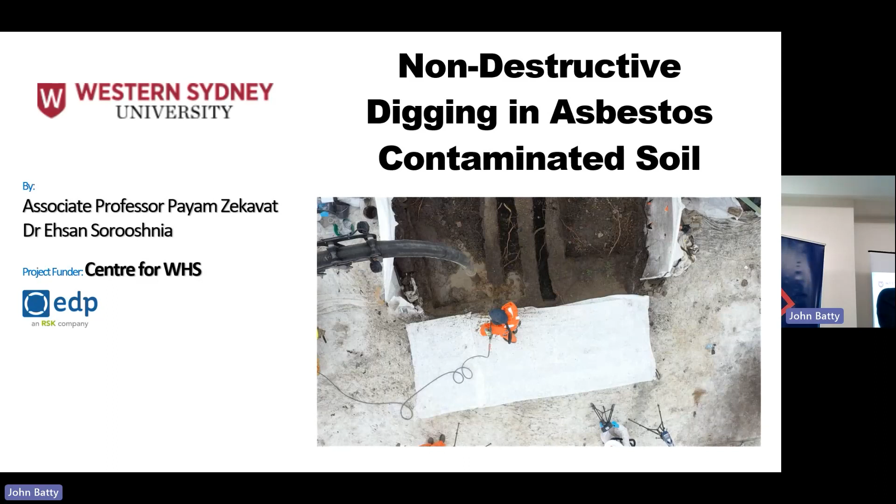We've talked about the scope. We originally aimed just to measure the risk, but in the design stage of the research, we realized that we need to expand it to cover other stuff like cross-contamination, the management, if the risk is low, what would be the controls that need to be taken into account, and decontamination itself. But today I only concentrate on the exposure itself, through the disturbance of the soil.

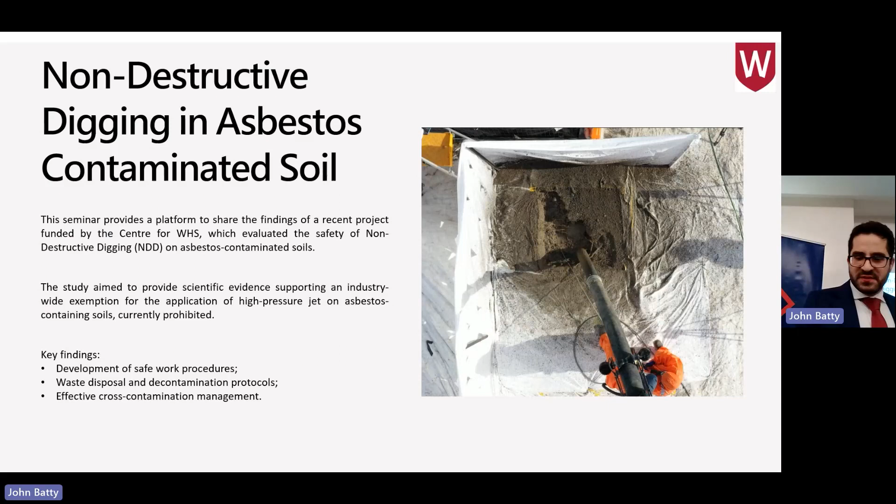What is non-destructive digging? In simple words, compared to mechanical excavation, where you loosen the soil by the impact of an excavator, in our case you loosen the soil using high pressure water jets or high pressure air, or even with pure vacuum. As long as you can loosen that soil, you can vacuum it. I'll talk about the advantages a bit later. How it works, you can see in the video, footage from the actual experimentation that we've done. You loosen the soil, there is suction; they're called vacuum trucks.

It sucks everything in, and as long as there is no asbestos, it's very practical when you have underground assets, where mechanical excavation is a big no-no because you are working around a live cable or some underground asset that you don't want to damage. That's really the solution. And it's becoming more and more prevalent, specifically a lot of NBN work. When I was talking to NDD providers, a lot of Telstra assets are already underground, so excavation around those assets is also a big deal. So there is a demand for working with NDD more and more frequently, but we know that it's very likely that you find asbestos almost everywhere across cities.

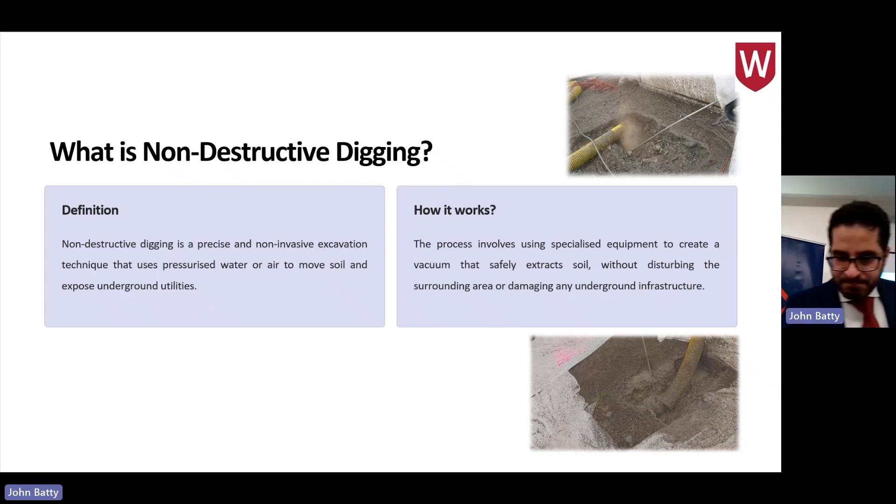The ultimate goal is to see if that regulatory ban can be relaxed. But at this stage, the idea was, let's understand the risk. Let's see what's the exposure rate and how we can manage that. I talked about water excavation, air excavation, and then vacuum excavation.

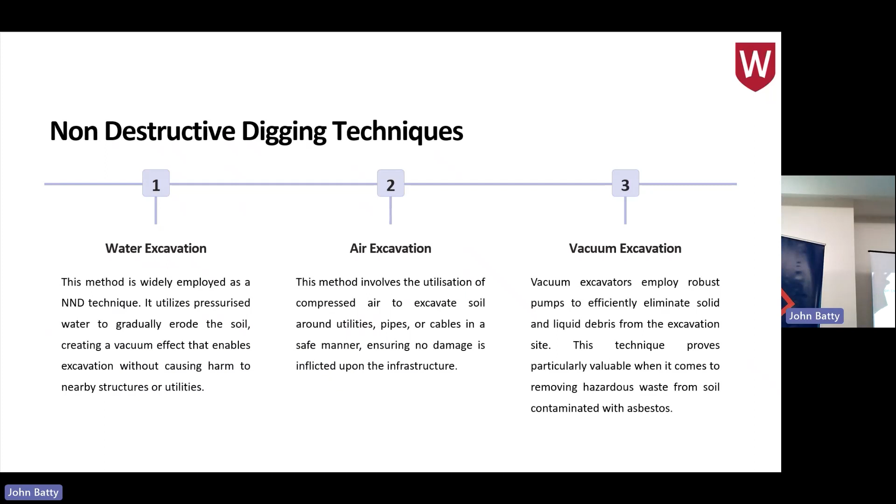In our case, the soil was loosened with high pressure jets. A water gun applies the pressure. It's called a Gerni when people in the industry use that. The technical word we used was water gun in our report. We use water jets simultaneously for high pressure water spray. Vacuum excavation, so the same thing. You need the high pressure to vacuum whatever has been already displaced.

It's very precise. You can aim exactly where you want to dig. So it's a big advantage that you don't have with big mechanical excavators. It's safer in a sense that you don't have a big machine moving around. In the context of asbestos, we studied that. Comparing to literature, mechanical disturbance of the soil releases asbestos, and as simple as driving a car on asbestos contaminated soil releases asbestos at a detectable level.

In our case, and I'm jumping into the results somehow, except one exceptional case, in the rest of the experiments we didn't have the asbestos reading in our air monitor up to the reporting level. So nothing was reportable. Everything was under 0.001 fiber per milliliter. Environmentally friendly and high efficiency. Again, efficiency when you consider the context, when you have barriers and obstacles that you need to work around.

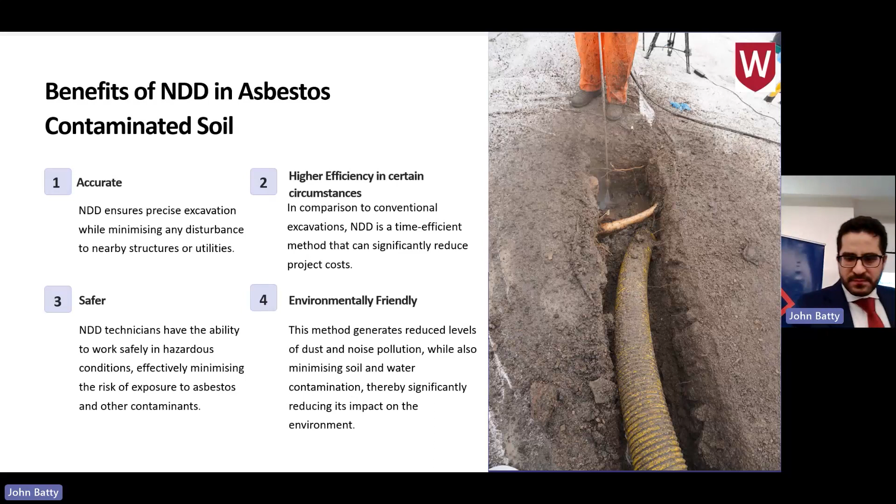What was our methodology? There were a lot of factors that played, and we needed to narrow it down to a few independent factors. What we ended up working with was the truck type, the water pressure, and the excavation pattern. So digging a trench or digging a broad, shallow square, or later we realized that when you do the digging, you end up with a wall of soil that you need to destroy. So that was our third type. So digging pattern, pressure, and truck.

Pressure, I need to talk about it here. For the majority of the trucks that we studied, and the two types of truck that we worked with, the pressure is not as easy as turning a knob. It's usually a tap that you just play around with. There is a pressure gauge, and the pressures that we read are the average of that pressure gauge on the machine. But there's not really a big flexibility in working with pressure with those existing machines, or at least the machines that we worked with.

But the highest pressure we worked with was in the range of 3000 PSI, which is relatively high. They don't go beyond that because it damages the pipe. That's against the purpose. You don't want to damage the underground utility. So usually, for your knowledge, the range that is very typical is 2000. Even 1500. Below 1500, it would be very difficult to dig. So they usually set it between 1500 and 3000.

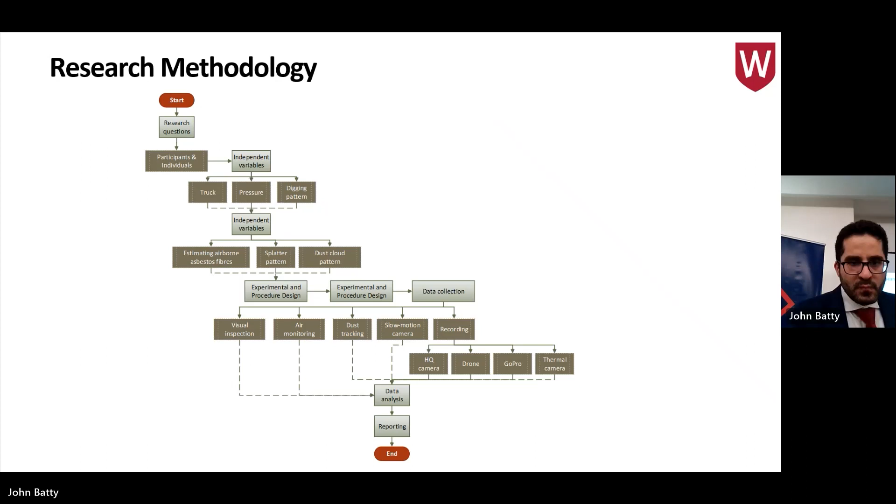In my introduction, you've heard that I like working with sensors, and other than air monitors and dust trackers, we used a lot of other sensors, like a slow motion camera, 4,000 frames per second. So that was one to see how things happened.

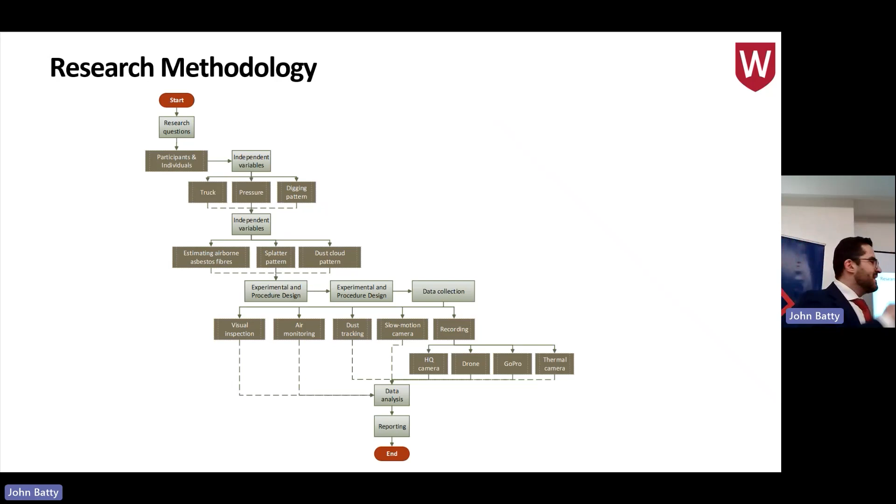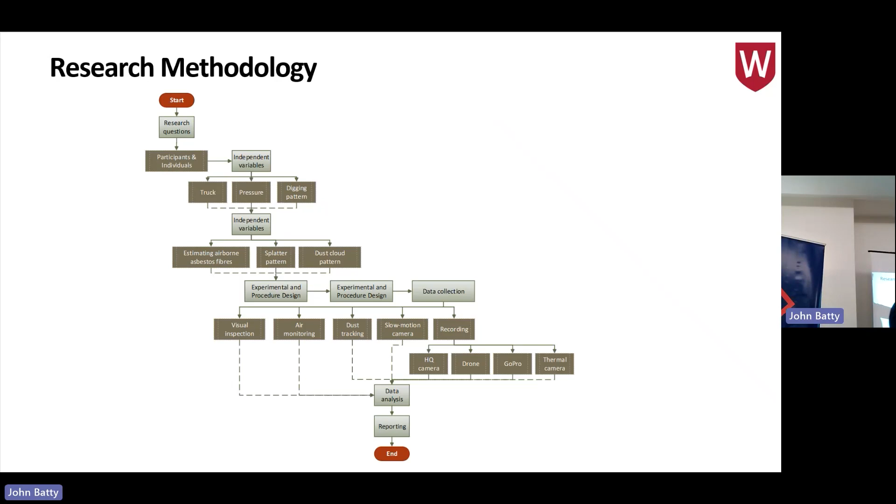Thermal camera. Water, in terms of its thermal properties, is different to soil, so we were able to track the droplets. Normal cameras and things like that. So a range of cameras with the actual data were our source of data stream.

The site itself, FS Garside Park in Granville. It used to be a playing field. Back in the 1920s, it was used as a rubbish landfill, as a rubbish tip. And you know, with rubbish tips come cockroaches and mice. So the simplest solution was to set a fire.

So people used to set fires, and when you read the council minutes, there have been a lot of reports about the fire, and asbestos being good in fire. It's not minuted, but one of the reasons we believe asbestos waste, like construction waste, or asbestos in bulk was deposited on site was to manage those kinds of fires.

And there are minutes from the Council in 1937; the solution they had was to fill that depression as quickly as possible. So they asked for more waste, kind of sent an invite to other councils to send their waste. And the spot that we dug was actually construction waste, mainly asbestos containing material, ACM. We picked this corner, the mound here.

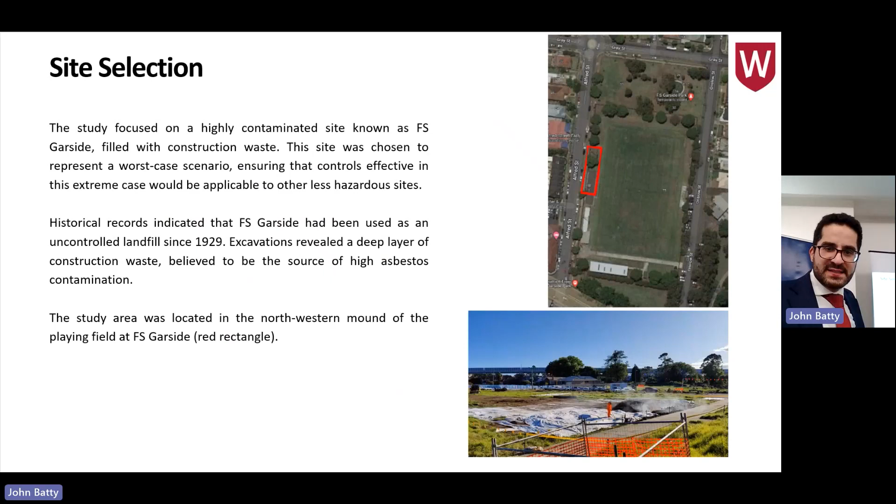A good thing about this project, again, we had an on-site containment cell, so it made it very easy for us to tip the slurry, the excavated material, on site. We also tipped off-site. There is only one facility in New South Wales that accepts asbestos slurry, liquid asbestos waste. So we had to work with them as well, Cleanaway in St. Marys.

Too much. Okay. We started with an enclosure, a bubble. We ran our early tests inside the bubble to make sure the exposure is not significantly high. In later experiments, when we had our readings and realized that it's manageable, we came out and tried to see if it can be managed in open air.

Interestingly, and many of you would know that, inside the bubble we had a negative air unit, but we didn't turn on the neg air during the excavation, just to replicate the worst case scenario. And in the outside experiment, where we had a very gentle air movement, a breeze, it actually helped with dispersion. So I will show you the results. The outdoor experiments actually recorded a lower number of fibers on our membrane compared to the indoor experiments.

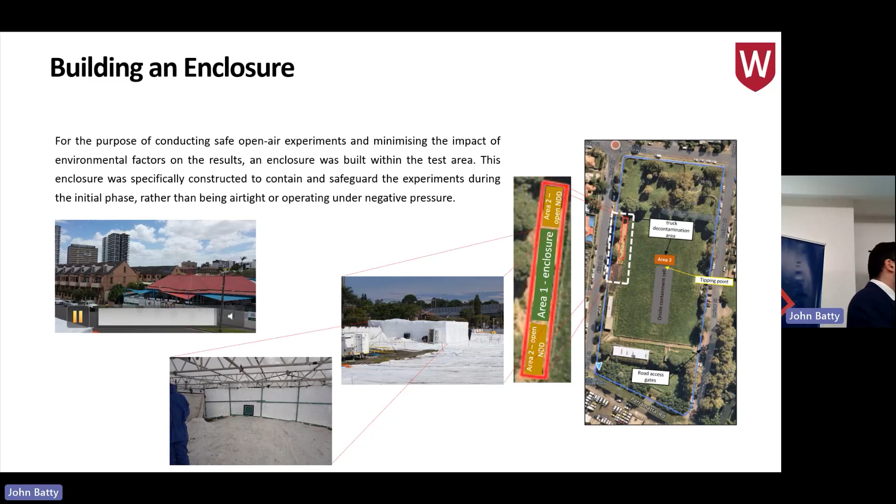The bubble itself, we had 2 cells in the bubble. After each experiment, if the airborne concentration was above the reportable level, we turned on the neg air, then we did the clearance check to make sure it's ready for the next round of the excavation.

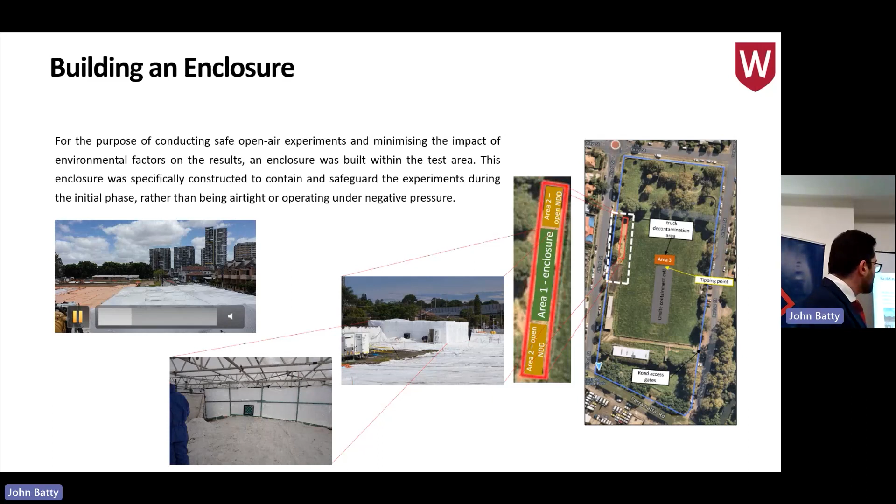19 experiments in total, 10 inside, 9 outside. I think it shows the location. This is our bubble, cell 1, cell 2, and those that have been conducted outside. You probably can't read the numbers, but it gives you the actual air monitoring numbers.

Except experiment 1, which I will talk about, for the rest of the experiments we have 3 exposure monitors: on the NDD operator, on the laborer, the assistant, and on one of the researchers. 3 background air monitors around the excavation area, and 8 control monitors across the sites.

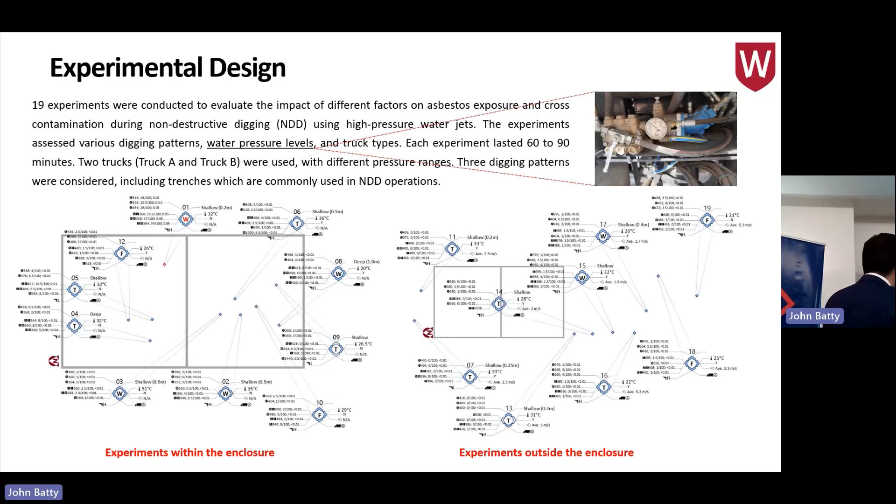In the 19 experiments that we ran, all of the readings were below reportable level, except... 18 experiments, I should say. The first experiment was an exemption. I'll tell you what happened there. Only 1 air monitor recorded 0.05. Anyway, the first experiment, what happened?

The idea was, let me discuss the air monitoring. I think it's something interesting for you guys as well. One of the challenges we had was to make sure the air monitoring data that we collect is reliable. And you would know that how much air you suck in is key, and for how long the monitoring goes on. So we had a discussion with a few of the colleagues.

We ended up setting 400 liters for the amount of air that needs to be taken in. And given the productivity of the NDD excavation, we ended up running 90 to 100 minutes of actual excavation. Each experiment took around 2 hours from the start. There were some glitches in some of the experiments.

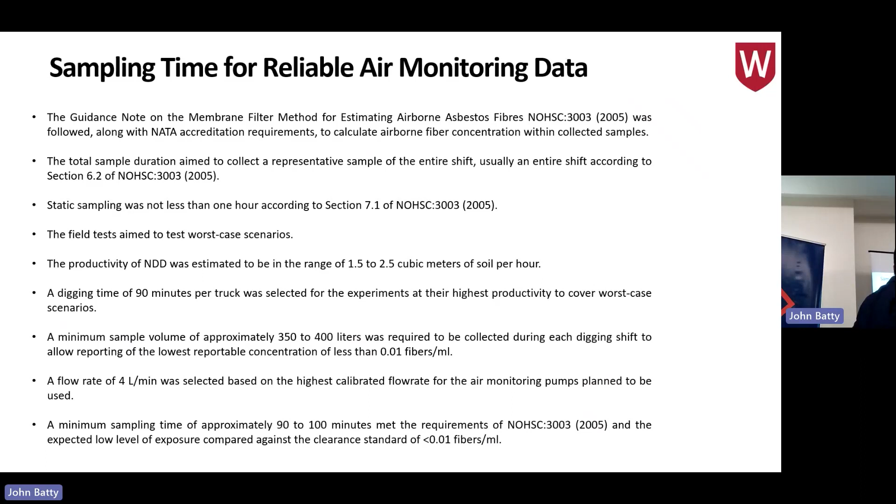For example, the pipe is very likely to clog if there is a big chunk of stone or a big rock that it's sucking. So there was like a 5-minute, 10-minute interruption for the operator to clear that blockage and things like that. But there was at least 100 minutes of active digging. 400 liters was our threshold, the number that we ended up working with. We set 4 liters per minute in terms of the flow rate, and each experiment was run for 100 minutes of actual excavation.

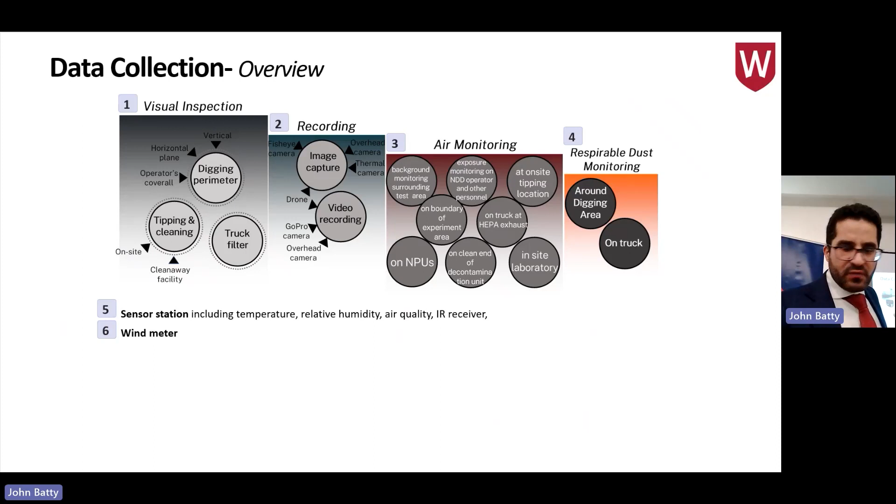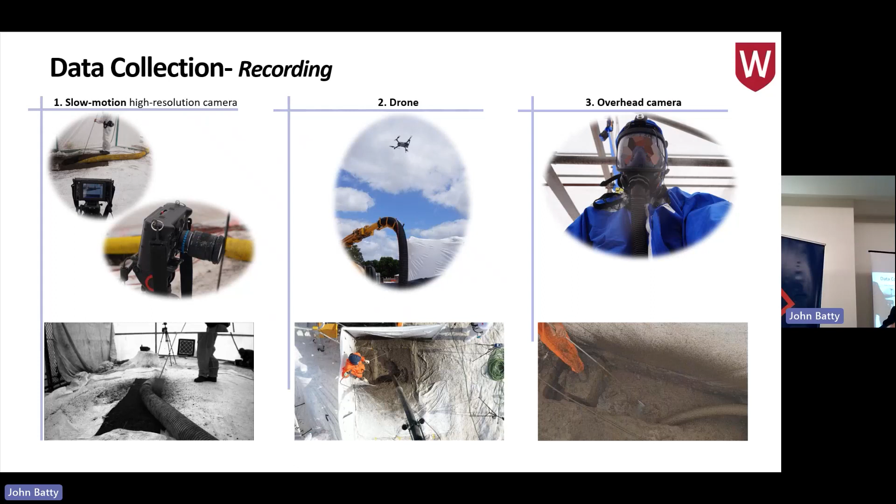So data collection, I won't bother with the list of the sensory data that we worked with. I already talked about it. The slow motion camera. We had a drone to have a bird's eye view. We had the air monitors, the GoPro kind of camera on the operator. What else? The air monitors on the operator in the breathing zone of the operator. The air monitors around the excavation area, 3 of them, the background monitors, and the control monitors.

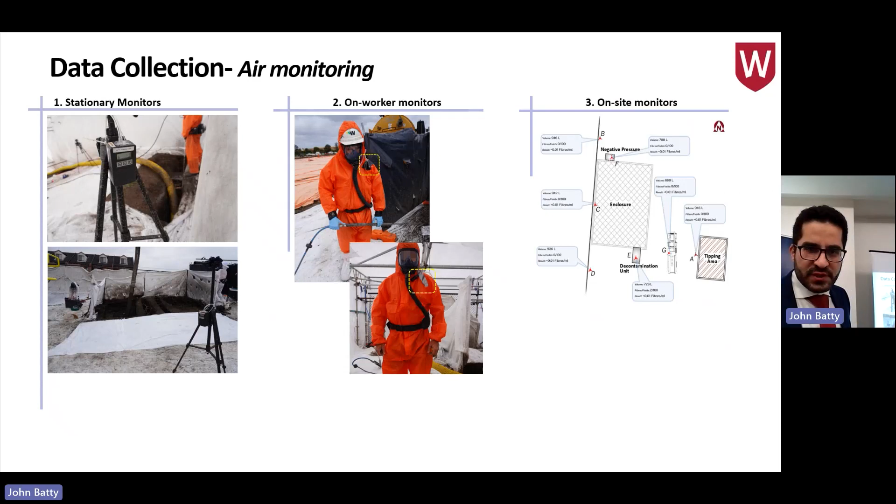Another important fact about this site, we have a childcare center on the opposite side of the street from where we installed our bubble. So we needed to be very careful about that. So we had 3 monitors installed here. The childcare center was here. So we had 3 monitors installed for the control check to make sure the exposure is not high, and none of them were actually concerning.

DustTraks. So at each data collection station, we had an air monitor next to a dust tracker, just to make sure we can have a continuous reading of the splatter. You can see here, for example, we can record it. We have a synced video with the air monitoring data in terms of the directional work of the gurney. And we were able to track how that reading peaks and fluctuates as the operator maneuvers the gurney, in a different direction depending on the dominant direction of excavation.

You would see that the clock is the time, and this is the concentration that was read by each of the air monitors. So it helps us map the splatter size and intensity, and we assume that the dust cloud is contaminated. That was the assumption we had. As long as the dust trackers read something, we assume that it's contaminated.

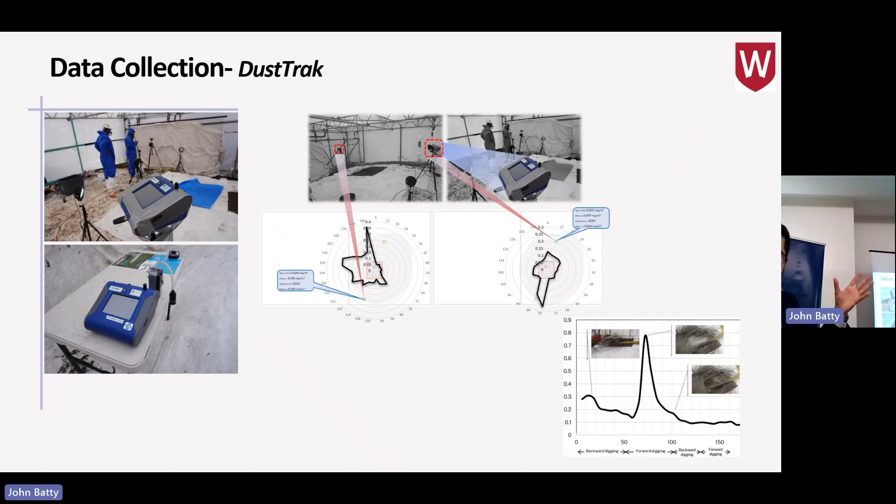Analysis of the results. The first experiment, I need to talk about it. First of all, because in the report all the air monitor results were under 0.01 fibers per milliliter, we had to work with another variable, and to be able to do some sort of correlation analysis, we worked with number of fibers per 100 fields. You know, when you use your membrane under the microscope. So we started working with that because that was the only number we could work with. So all of these reports are based on fibers per 100 fields.

The idea was that we complete the contaminated soil experiment, and then we go and work out ACM. If you apply a high pressure jet on ACM, what would be the impact? Unintentionally, it was unplanned. In the first experiment, at the very surface, after we removed about 20 centimeters, we exposed a very thick layer of compacted ACM.

And by compacted, I mean it was ACM material that was kind of glued to each other. We don't know what that glue was, but I can show you a few of the photos. Yeah, that's the layer I'm talking about, that white thing. So we ended up applying the high pressure jet on the actual ACM material. And the result, as you can see, was concerning.

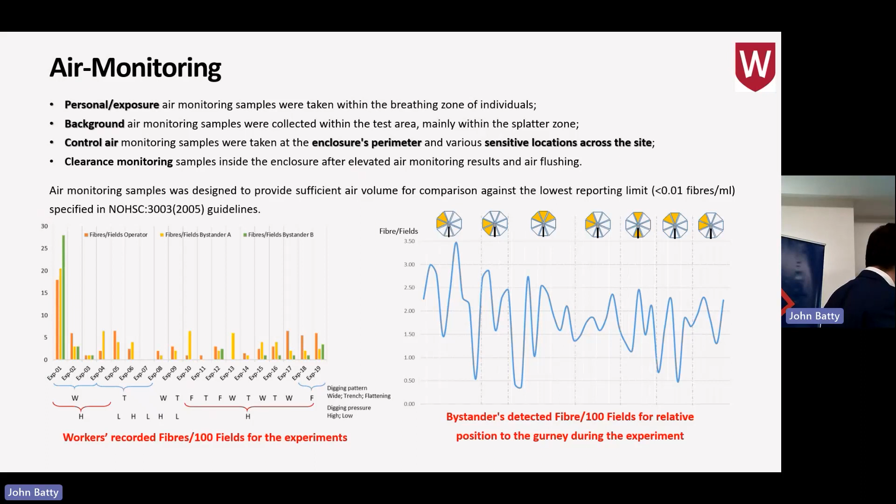So if you want a number for applying high pressure jets in severely contaminated soil, the number you expect is probably around 2 fibers per 100 fields. So that's the conclusion of this research. Collecting all of the data, if you want to come up with one number, it's 2 fibers per 100 fields, combining whatever data we had.

Going back to experiment 1, we also sent the samples for SEM to make sure it's asbestos, and you can see it's like 100%, 70%, 100%. It was actually asbestos. And the level of contamination was 2.2 percent weight, so it's significantly high. This one was ACM in that particular example.

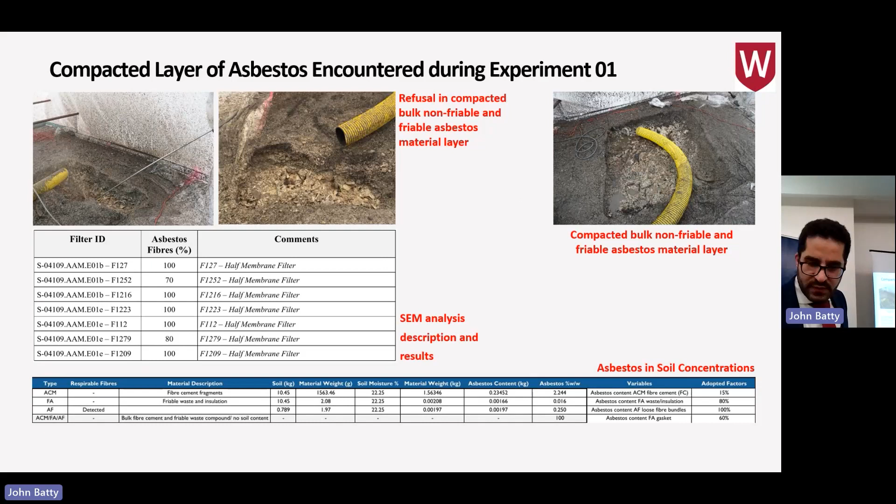Cleaning, decontamination. We took samples from the filter. Each of those trucks has a HEPA filter, okay? And we took samples from the HEPA filters as well. Asbestos was still present in the HEPA. So I need to explain.

The air, when it's sucked, goes through the tank where the heavier particles separate. Then the air goes through a cyclone centrifuge, then through your HEPA filter, and then out through the exhaust. We had an air monitor next to the exhaust. The reading was not concerning, but we found fiber in the HEPA filter.

Cleaning of the filter chamber itself was effective, but for the pipe, even after flushing a few times, we cut a cross section of the pipe and sent it to the lab. Asbestos was still present. So it's probably the material of the pipe.

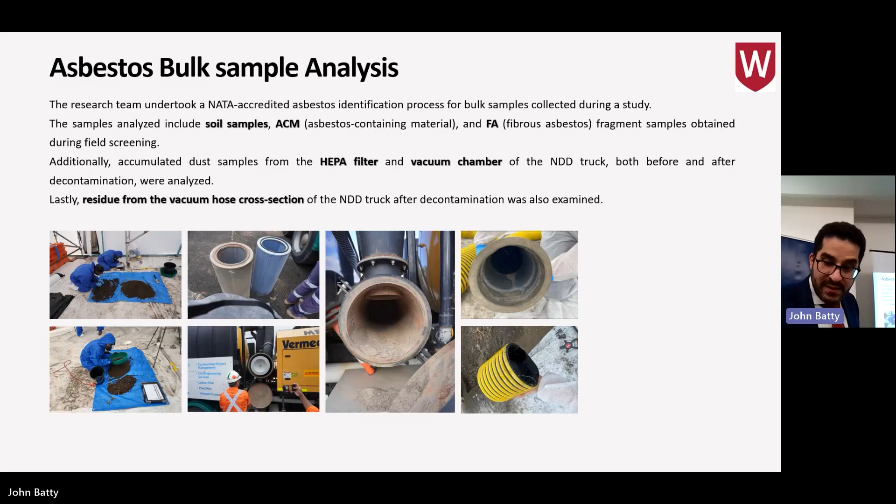So a very brief recommendation out of the research was that if you use that equipment for asbestos work, it probably needs to be dedicated to asbestos work. It cannot be moved from one project to another, because decontamination is almost impossible, since you can't check the internal circuit. So that's one other finding. And again, decontamination and cross-contamination was really critical.

I gave you an example of the slow motion analysis that we've done. Here is where we trace one particle. You see that water splash goes up, and then it's three-dimensional analysis.

And I forgot to mention Ehsan, by the way, when I was mentioning people. Ehsan was my postdoc helping me. This is Ehsan's work. Sorry, Ehsan, I forgot about it.

So this is how we've done it. That's the actual modeling that we've done. Another one is the drone footage that was then overlaid on what we had from our slow motion camera. And we had our model. For example, in our modeling, we now can apply the impact of wind. If there is a moderate wind, what would be the impact on your splatter size?

So again, if you want to have a number, 4.5 meters is a rule of thumb out of our experiment in terms of the size of your cross-contamination, the dimensions of your splatter.

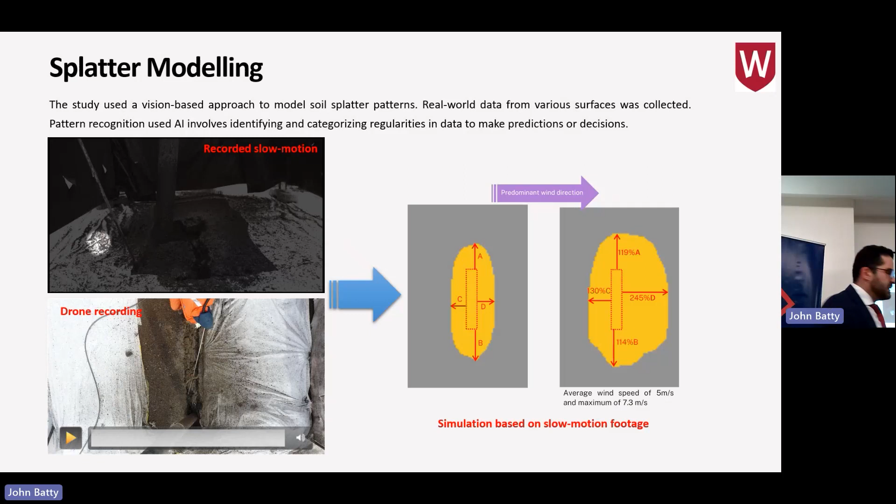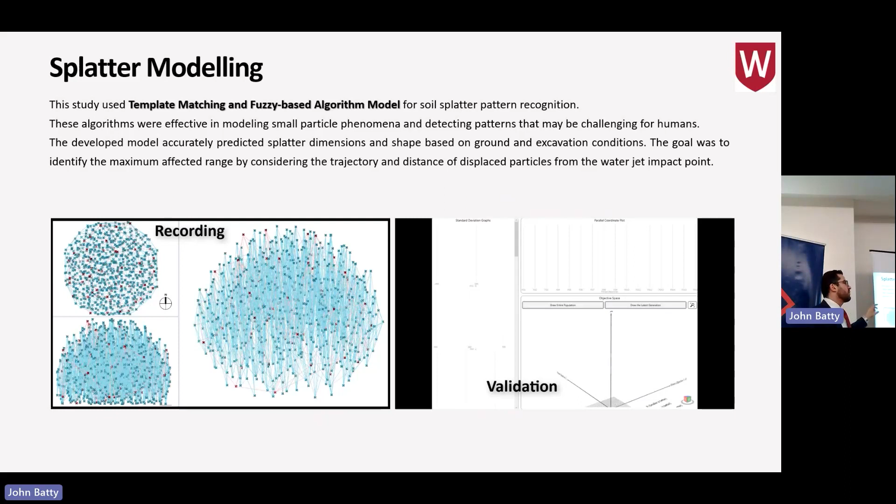A little bit, again, a video about the modeling itself. The red ones are the actual data, the green ones are the simulation. When the simulation maps and drops exactly on the actual data, it would be shown as red.

Am I right, Ehsan? Yeah, so the more red this graph is, the more accurate it is. That's just the way to read it. So now we are able to model the dust tracker, the dust cloud.

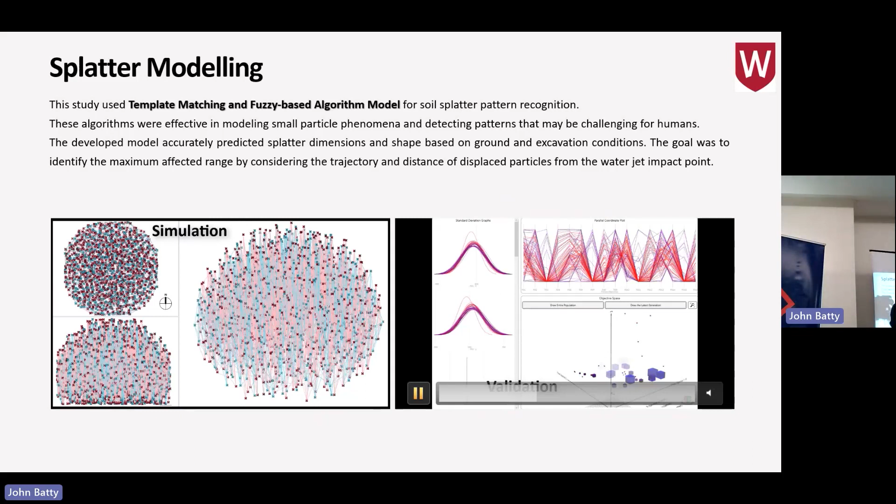This is the validation that we've done in terms of correlating, matching what we had against the data, and you see how the models start converging in terms of the reading of the next iteration.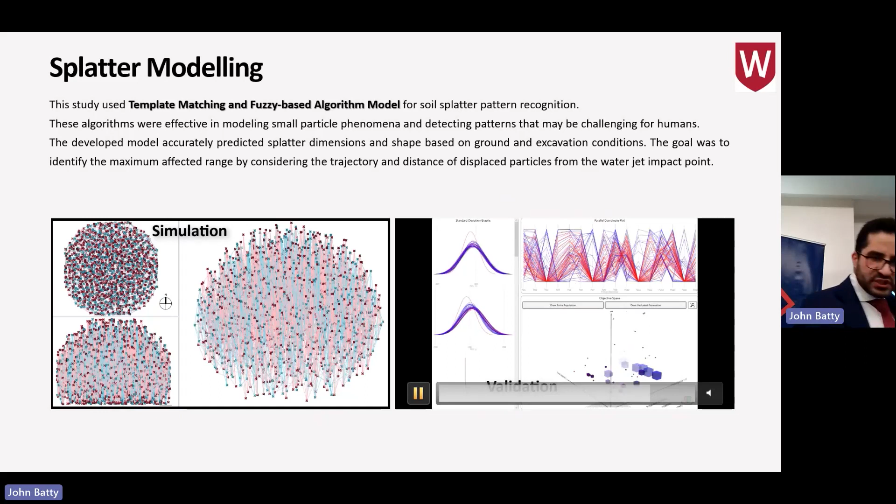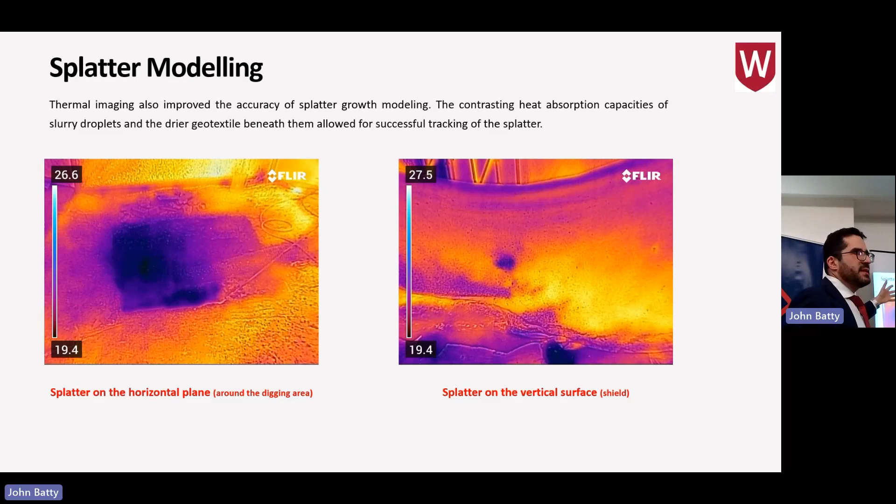An example of our thermal camera, how we've been able to track the darker, colder areas, apparently, and you can assume it's water, dust, a piece of mud, or whatever.

Results: high pressure and low pressure.

Let me put it this way. The independent factors we studied had an impact together. So when you combine two or three of them, you see an impact, but when you study each one individually, you don't see a big impact. For example, truck combined with high pressure shows an impact, but pressure itself probably only shows 10-20% impact.

Yes, the truck is a variable. What's the variable there? Is it the amount of differential pressure of the vacuum? The first question in my mind when we started picking that as a factor was whether they are the same. What we realized is that the design is the same, the mechanism is the same, but the dimensions are different, and the way pressure is controlled is different. We weren't able to identify exactly what in that truck creates a difference, but our results show that when you move from one truck to another, the results are different.

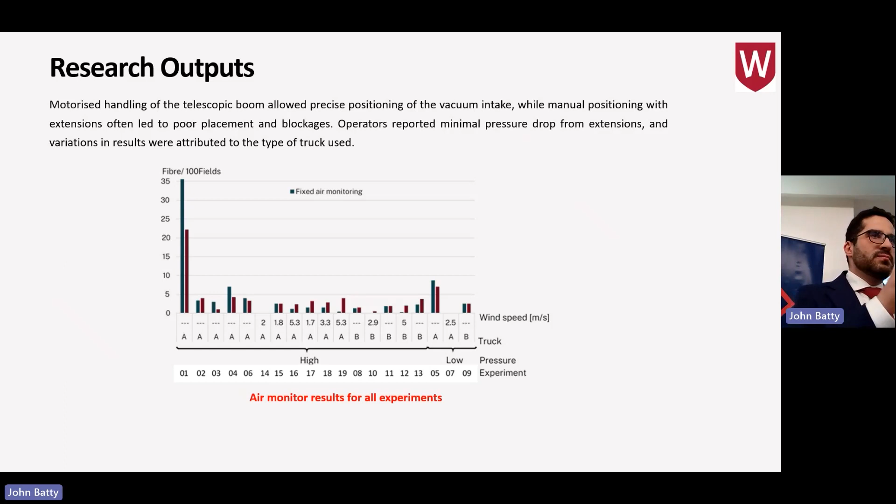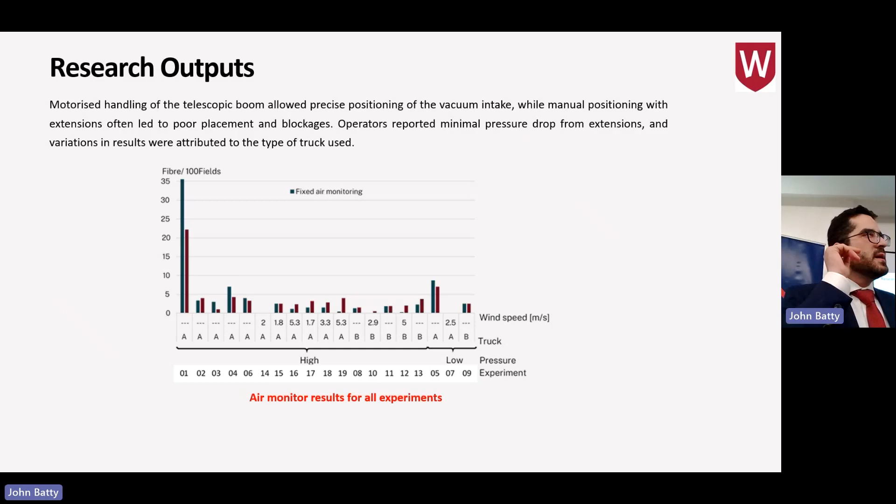So we're looking at something being blasted and then thrown in the air. Was it considered, perhaps, the amount of velocity and volume as opposed to pressure? Could you use the existing information to see if it's better correlated to velocity rather than the truck? How was the pressure between trucks calibrated to ensure it was the same? Just food for thought. Yeah, velocity, you mean jet velocity? Yeah, jet velocity. Does that make sense? Yeah, I understand what you're talking about.

Look, we haven't done that, to be honest, we haven't looked at it. Food for thought to see whether it's actually a better measure. Yeah, I'm just thinking how we can calculate that. The problem with the pressure was that when you ask the operator to set it at 3,000, it's not constantly 3,000.

It drops, moves up, comes back, so it's an average of 3,000. It's really an instinct of the operator—they only have a tap to play with to adjust it to 3,000. They were really skillful operators. You would be amazed to see how they adjusted in an angle, and it gives you an average the pressure you ask them to give.

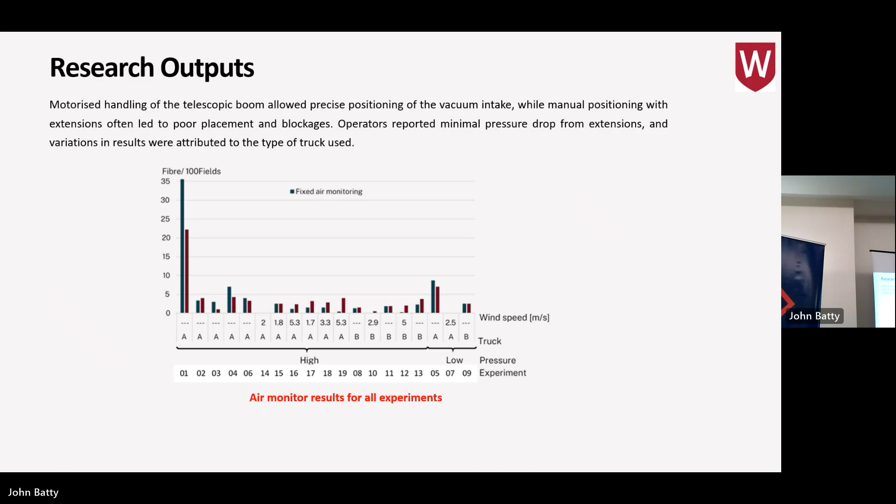And this is an effort—look, the finding, again, the message, we only have to rely on air monitoring data. Whatever I'm explaining here was an effort to find a model to correlate something, to formulate something against our independent variables. But the main conclusion should come from the air monitoring data, full stop. Whatever I'm saying here was some statistical analysis trying to see if there is a relationship between those factors.

When you do your factor analysis, the final product gives you a few factors, and we ended up using 2 of them because they covered the majority of our variation. The third one, if you check the report when it's published, is too small to be considered significant. So we only had 2 factors that explain all the variation in our model. For those 2 factors, you do some analysis and find eigenvectors and so on—I don't want to bother you with that. We ended up having 2 perpendicular factors, F1 and F2.

Which one is F1? This is F1, correct? Yeah, this is F1, this is F2. Anything close to F1 means the variation in that experiment was modeled or described by that factor. F1 is a combination of pressure, truck, and digging pattern. About 60% of F1 is digging pattern, 20% is pressure, and 20% is the truck type. So a combination of those three, with digging pattern being the most dominant, explains the majority of our experiments.

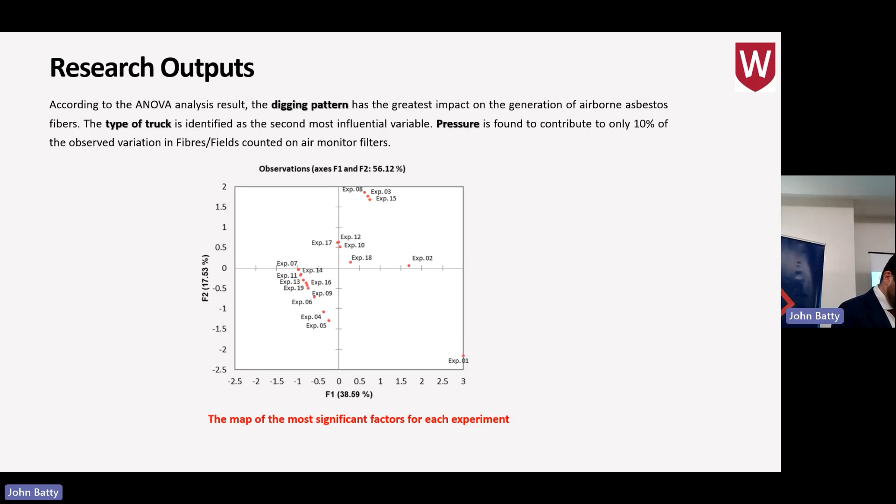But digging pattern—for your information, in reality, in real life, the majority of the time when you use NDD, you do a trench. And trench, compared to the other two patterns, is the less concerning one. I don't want to use the word safer—it's less concerning, because when you dig down, it actually confines itself. The splatter is confined by itself.

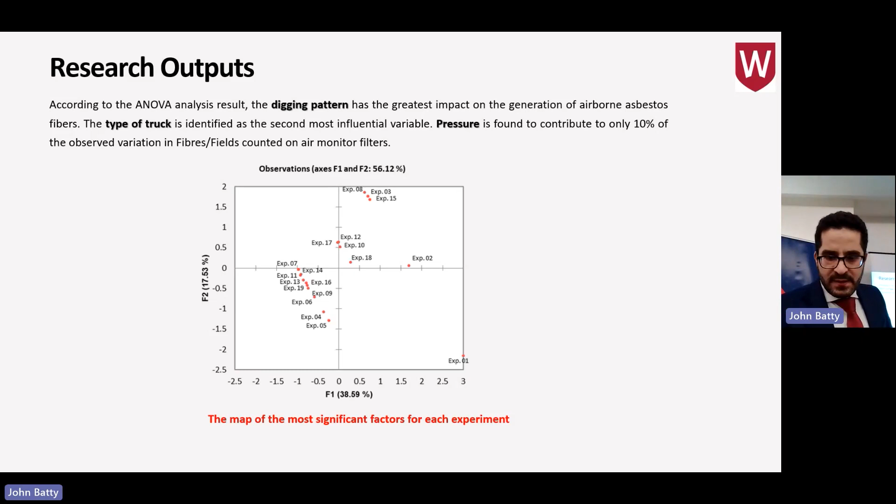Look, individual impact, I told you, they work in group. But in terms of individual impact, the pressure itself, when we switch from high pressure to low pressure in truck A, we had a 10% drop in the maximum horizontal splatter, and 2% decrease in vertical. So vertical was less sensitive to pressure drop. For truck B, these numbers were 15% and 9% - comparable, but not as significant as you'd expect. So when you drop the pressure in the range of 10%, you'll have a smaller or bigger splatter, and horizontal splatter is more sensitive to pressure than vertical splatter. There's a weak but direct relationship between pressure and splatter, as I've already explained.

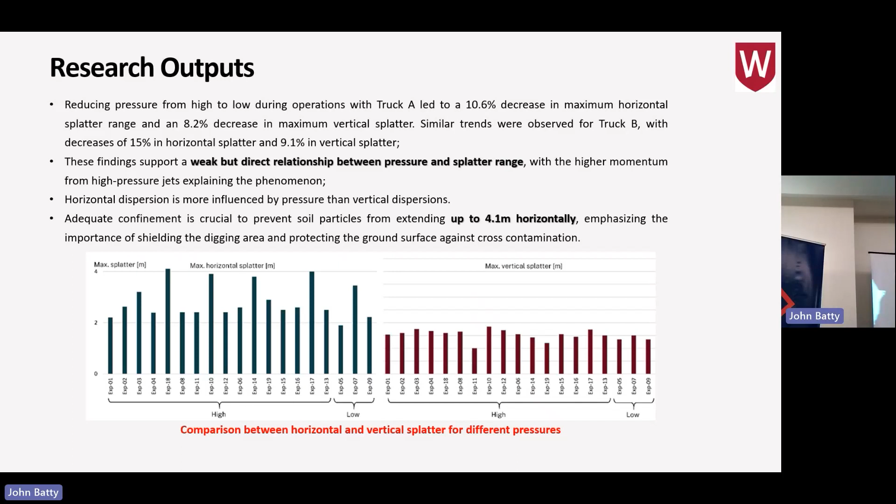The range is 4.1 meters in terms of size, if you want a rough estimate of the splatter size. Again, you see that the horizontal splatter, when we shift between pressures - vertical is less sensitive, correct? It's more uniform than when you apply and consider horizontal splatter.

Conclusions - we've already moved 40 minutes. So with contaminated soil, the liberation rate is manageable, okay? But the risk is still significantly high because you have cross-contamination and the decontamination itself is challenging. Keep that in mind.

Air monitoring data - all of them were under 0.01 fiber per milliliter, the reportable threshold. When we applied it on ACM, numbers were significantly higher. So it needs a separate investigation to understand what happens when you apply it on ACM.

Cross-contamination is a big concern, the third finding. We have a model - using that model, with the pressure, with the type, with the excavation pattern, we can give you an estimate of the size of the dust cloud. And using that, we ended up calculating the size and dimension of a shielding.

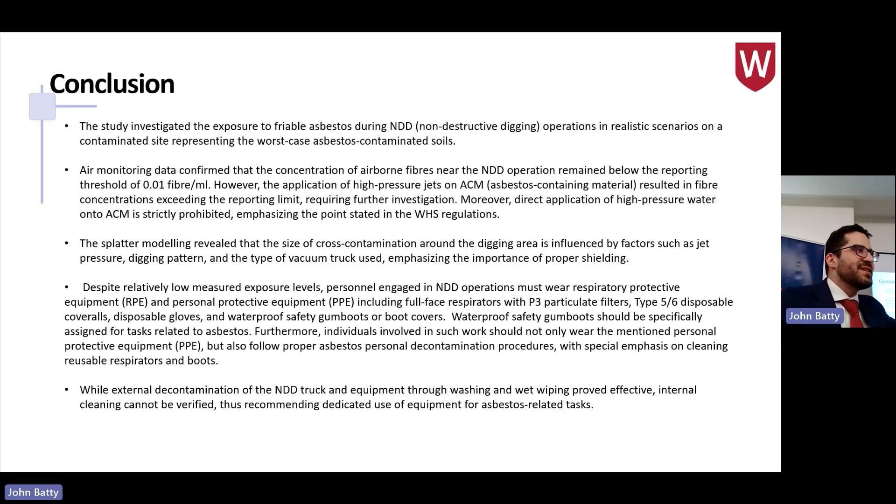And look, it might be a big economical - we may work out the regulatory barrier, but there's another barrier, an economical barrier, because we recommended that you need to reserve that truck and equipment just for asbestos work. How big is the asbestos business for NDD? The anecdotal evidence is that it's big, big enough to justify that, but we haven't done a quantitative analysis.

Part of this study, we did a qualitative analysis when we interviewed different stakeholders. They indicated that the market for asbestos, for NDD on asbestos-contaminated work, exists there. The potential is there, but we haven't done a quantitative analysis, so I can't really give you a number in that regard, but that might be an economical barrier which needs to be overcome. All right, thank you for listening.